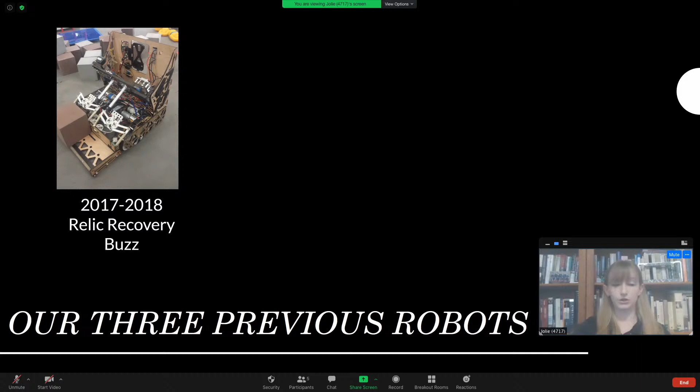So just looking at our past couple robots over the past couple years, this was our 2017-2018 robot. His name was Buzz. He was a little different. A lot of teams that year focused on a dump truck type of robot where they would intake blocks and then turn around and just shove them directly into the cryptobox. That was the scoring for that season. And so we did a little differently. We used 2 arms and then just pulled them over the robot, which you'll see in a video on another slide.

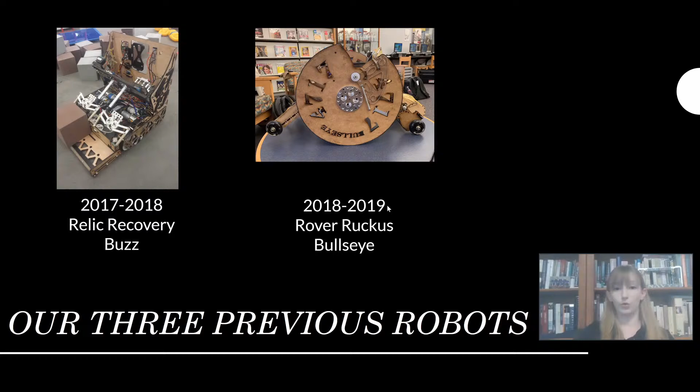So 2 seasons ago, 2018-2019, our Rover Ruckus robot was Bullseye. And the main innovative feature you'll see here is that we took a divot out of our wheels and we had 2 big wheels instead of having like a 4 to 6 wheel robot made like a tank drive type robot. And what this allowed us to do is climb over the ledge in the corner of the field.

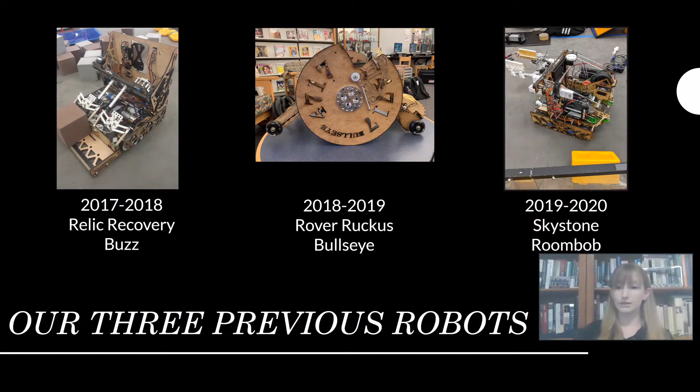And then last year, our robot for Skystone, his name was Roombob, and he focused on, instead of stacking Skystones from the top, as many other teams did, we stacked from the bottom to maintain a consistent style.

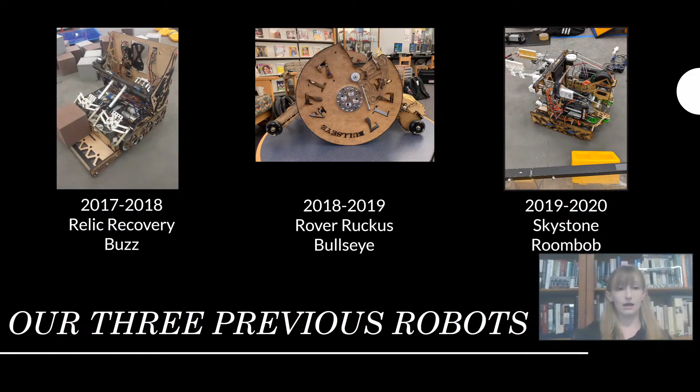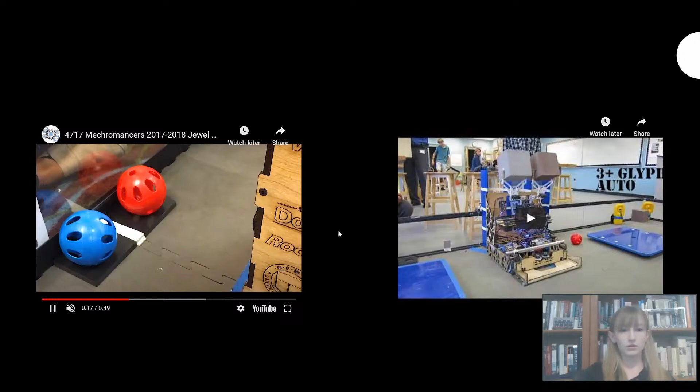So just little videos real quick to show some of the innovative things we've done over the past couple years. This was our jewel hitter in the 2017-18 season. And it relied on using a rubber band and stored energy, so that we didn't have to have another fully automated mechanism. We didn't have to have another motor or anything. It was all done on its own. We could just use a servo to release something, and you can see it uses rubber bands to actually pull

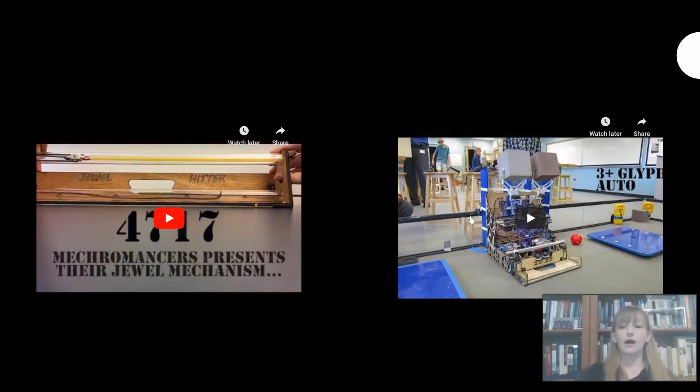the point around. And then again, from that season, you can see exactly how we lift and score instead of doing a dump truck method. So that's just a little bit there. You can see how we used sliding instead of turning and stacking.

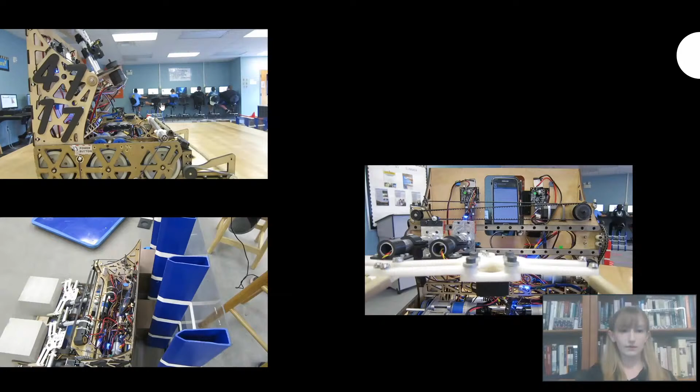So again, 3 seasons ago, you're going to see a little bit of the innovations that we were going for when designing that robot. So again, the arms going over, so we didn't have to worry about turning around. And then you'll see here, we used arms to line up specifically where we needed to go. So our robot never really had to move; it just had to go back and forth.

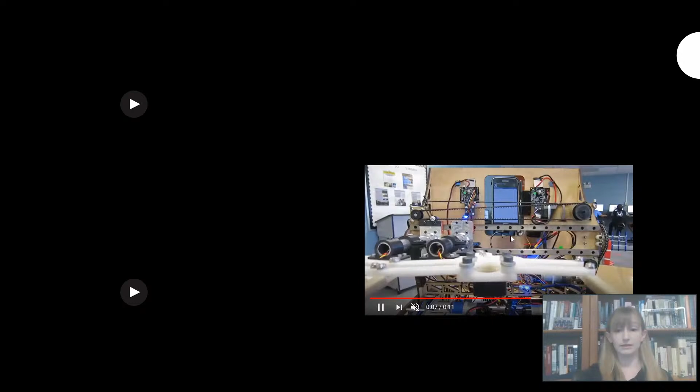And you can see again the arms. We had them automated so that they could either move on their own, or you could just press buttons and they would move together. So our Relic Recovery robot, wrong one.

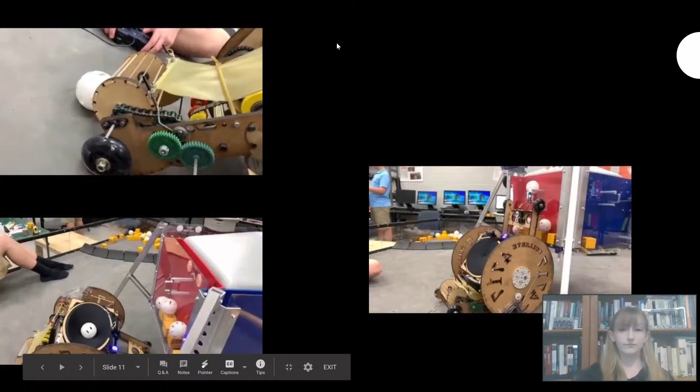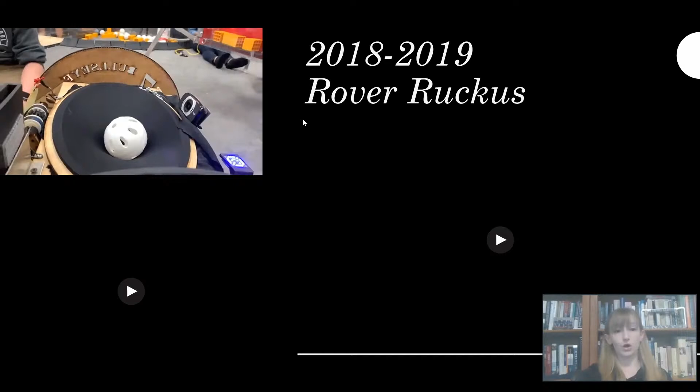Rover Ruckus robot, you can see that we chose to create an intake on an arm that could actually flip up and down. Those arms were meant to stabilize the 2 big wheels that we have on either side of the robot. And you can see we wanted to focus on launching. A lot of other teams used a scoop and dump method. And that year, you were allowed to launch as long as you were touching within the lander. You had to be underneath it somewhat. So we focused on that.

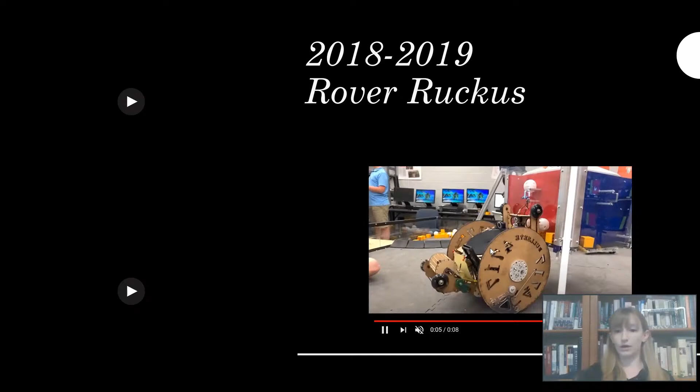And when we wanted to lift ourselves, we focused on using the entire robot to curl up instead of an elevator mechanism to just go straight. And then this past season was our Skystone robot. You can see right here, we wanted to use a conveyor belt for our intake. And that allowed us to slide everything directly out. This was our original mechanism, a shoving type mechanism, but it was having some issues, so we transitioned into that conveyor belt that you saw above.

And our main goal with this robot was to really stack from the bottom, which you didn't see a lot of times. A lot of teams went for stacking from the top, but what this allowed us to do is we never had a maximum stack limit. We could continue to stack until the time was up. We had no hardware maximum. So the innovation process, talk about that.

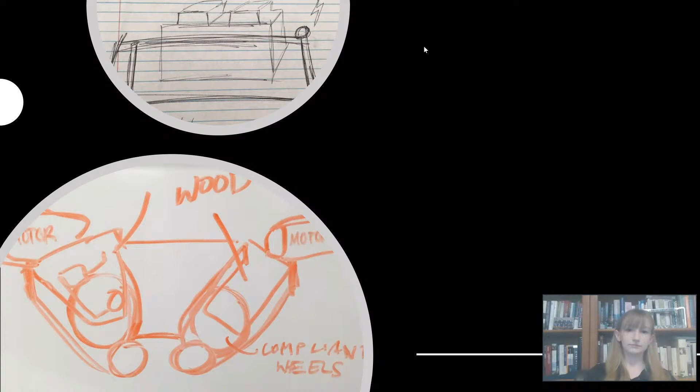Ben, you're muted. All right, I'm going to let Ben fix his muting situation. Oh, my bad. I thought I was unmuted.

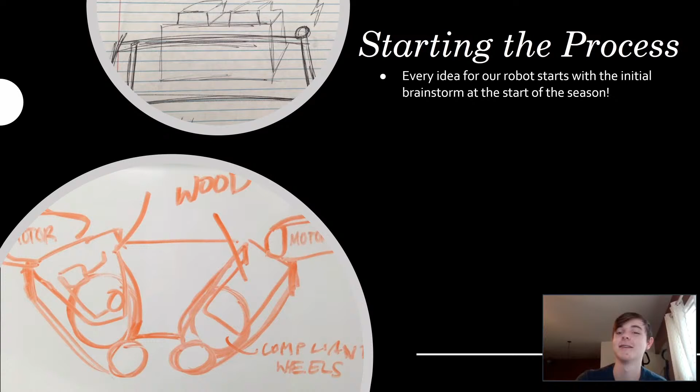So every idea for our robot starts with the initial brainstorm at the start of the season. As soon as we get the game, we look at the game, see what designs would work, and then we try to sketch it out. These are 2 of our sketches for the past season, Skystone. This is part of our intake that we saw, and it's free and easy to sketch out a design, and it helps communicate to everyone.

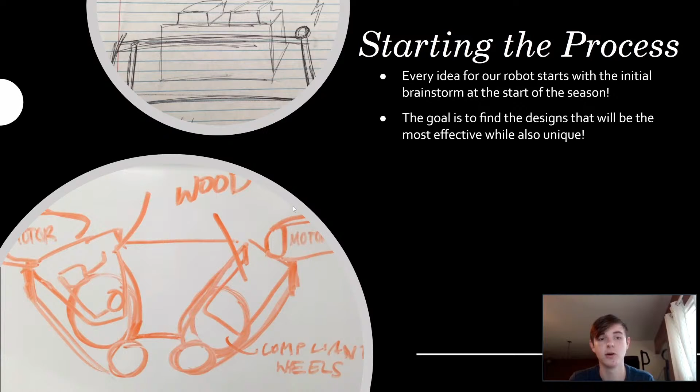But we try to see how the game can be made more interesting and provide more opportunities. So it makes the challenge more fun, and choosing a design that's going to be somewhat challenging to you, but enjoyable, leaves a lot of room for learning opportunities while still being innovative.

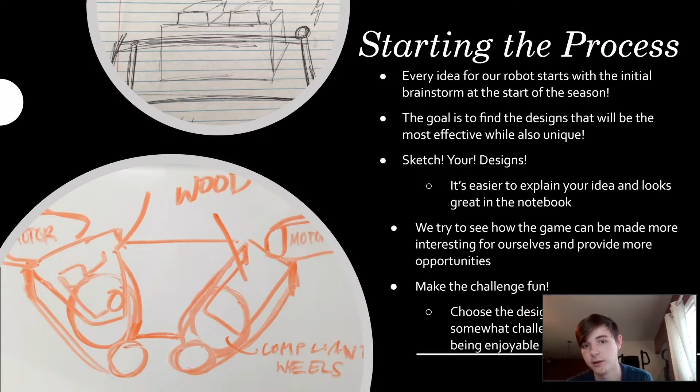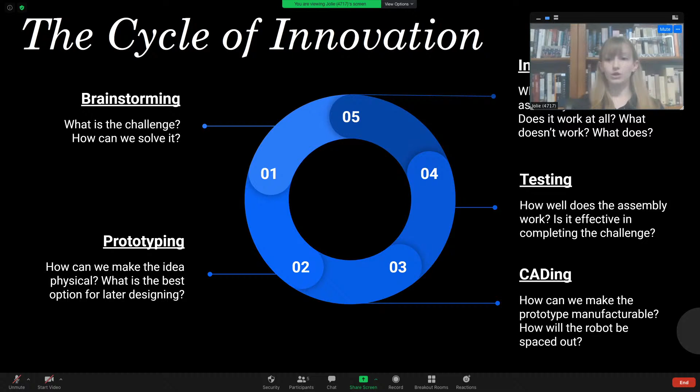And then you move on to improving. So how can you make it more effective? Does it work? What doesn't work? And how can you make it better?

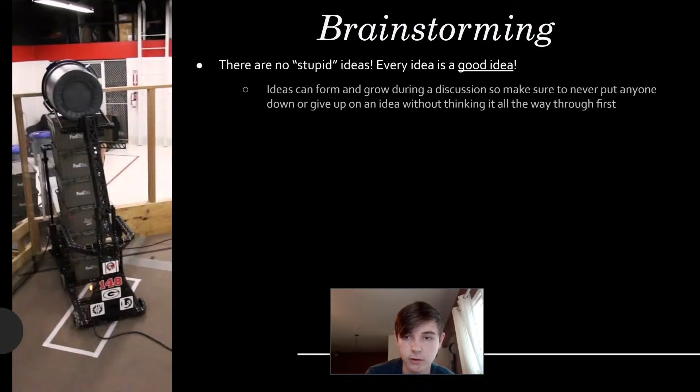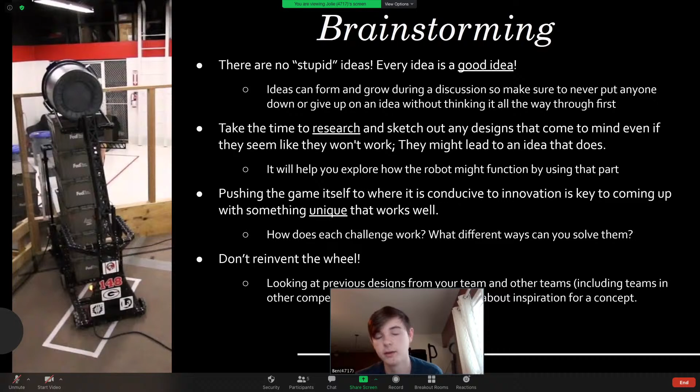All right, so the first step is brainstorming. So there are no dumb ideas. Every idea can lead to other ideas that may not have been thought of, even if the first idea wasn't even communicated. You also got to take the time to research and sketch out the designs. Any of the designs that come to mind, if you sketch them out, it'll help it be a more realized concept, even if it seems it doesn't work. It'd help you explore how the robot might function by using the part, or how it could fit into the robot as a whole.

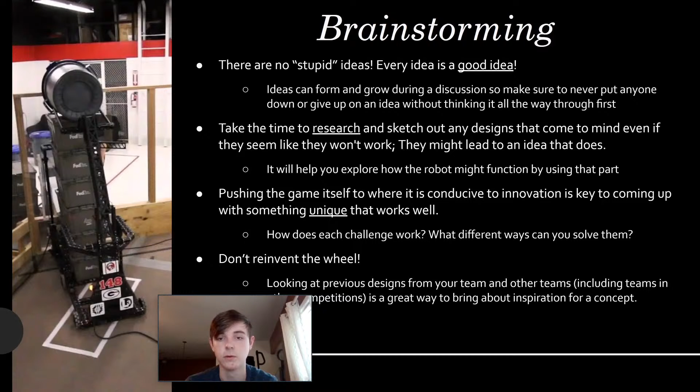And pushing the game itself is where it's conducive to innovation. So coming up with a unique way to play the game and how each game works and which way you can solve them. But don't think of every idea as having to reinvent the wheel. Look at previous designs from both your team, other teams, including not just FTC. You can see here 148 Robo Wranglers in the Recycle Rush season was an inspiration for our Skystone robot because their game was stacking recycle bins on top of each other. But they stacked them underneath. So we took that idea and then translated that into an FTC and made it more innovative towards our robot.

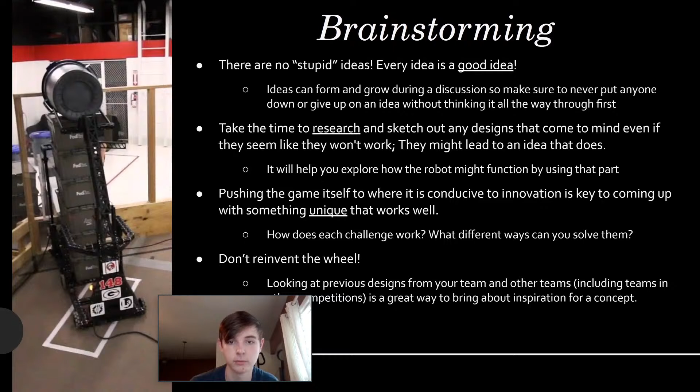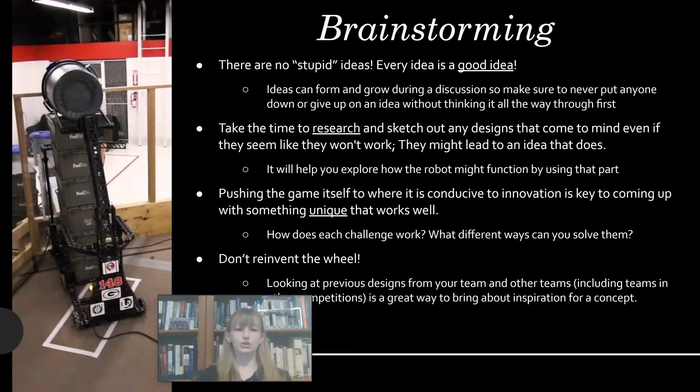Yeah, so just to emphasize, when you're doing something with an innovative idea that you have, it's always great to really research things that have come before you, just to make sure that you're not spending too much time trying to come up with something. If you see something that works, figure out how you can improve upon it.

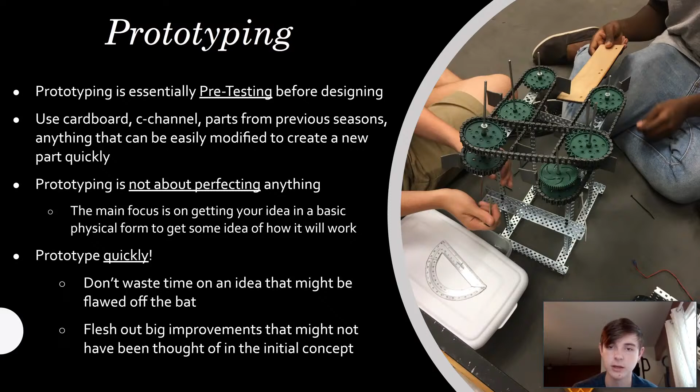And then after you brainstorm and thought of a couple ideas, prototyping is really, really important. It's basically pre-testing before you actually have to spend the time to make it and manufacture it. So you can use anything that you can get your hands on: cardboard, C-channel, Legos, I've heard from other teams. You see in this picture that it's not a very elegant design and it's not really properly made, but it's not about perfecting anything. The main focus is get some improvements that might have come out after you've made it instead of spending all that time to make the final product, but then having to realize you have to change it.

You have to do this quickly. Don't waste time on an idea that might be flawed because you might have an idea that seems like it could work, but when you prototype, it won't work at all, and then you wouldn't want to waste the time and resources on finishing the final product. And you want to flesh out those big improvements that can be made, like, oh, this wheel can't be there because it'll mesh with a different gear. That's easy to come out in prototyping, but it's really costly in time or money if you build the whole thing.

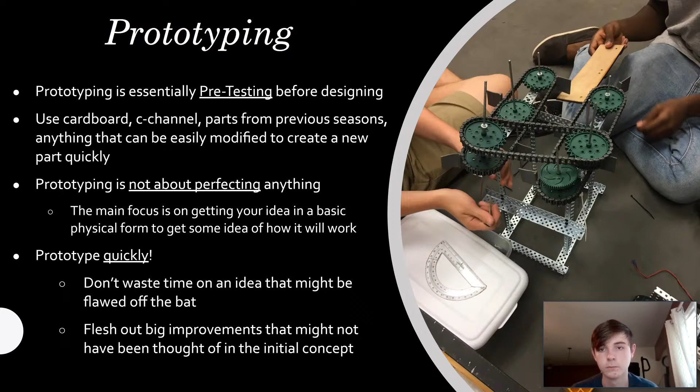Yeah, just to emphasize, when you CAD something, you can CAD anything you want, any shape you want. If you have the materials to be able to manufacture it yourself, you can do anything. And the great thing about prototyping is that it forces you to work with somewhat what you have and to really figure something out that's realistic instead of daydreaming about everything and just CADing the whole day away.

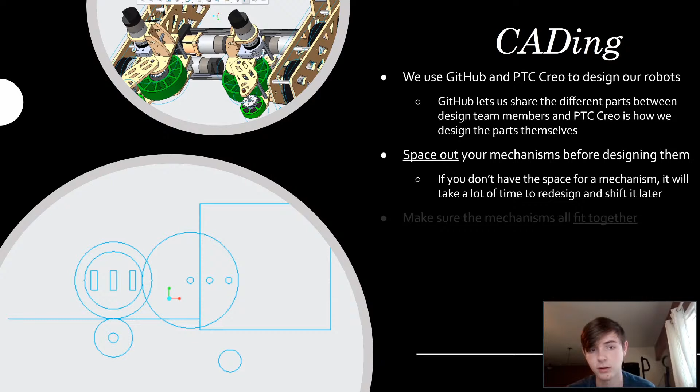So moving on to our CAD. On the topic of CADing, we use GitHub to share all of our files and resources. And the actual software we use is called PTC Creo.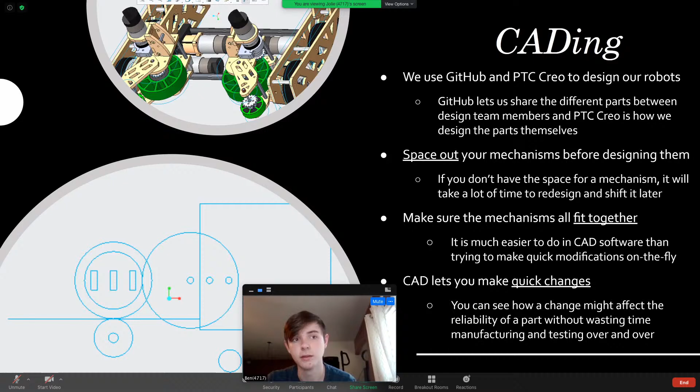PTC Creo is good because it allows you to create skeletons, which is what the bottom picture is. And it allows you to build stuff off of a simple design. So you could take your sketch that you made during the brainstorming process, put it into CAD, and then build stuff off of it. And another good thing about CAD is you can space out your mechanisms.

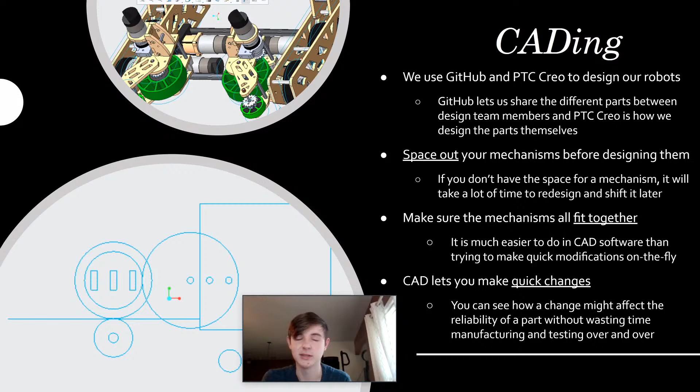So if you were just trying to build it on the fly, you might run into a problem of, oh, this mechanism doesn't have enough space to put next to this other mechanism. But in CAD, you can see that and you can make changes effectively. And it doesn't take a lot of time to change something in the CAD, but it would take a lot of time and resources to change something on the actual robot. So CAD can let you make quick changes and see how it could affect reliability without wasting time manufacturing.

So after you've CAD'd and manufactured everything, obviously you have to test. So we like to keep a log, just like in science class. If you don't write it down, it never happened. Usually this log will be the engineering notebook, which we'll talk about later, which makes it easier for the notebook to happen. And your idea is never completely finished the first build. The more you test, the more reliable it will be.

But don't give up on an idea just because it doesn't work once. Sometimes just a few small tweaks will just work, and it'll make it easier to work in competition without abandoning the idea all in all. More innovative ideas like our previous robots come with a lot of testing because you can't really look at other people's and see, oh, what do they do? How do I fix it? You really have to come up with it yourself, and a lot of the ideas won't work, but you just have to keep testing and testing.

Sometimes assemblies will not work at your first competition. One of our ideas in the Relic Recovery season didn't work a single time up until the league championship. But then once it worked, we got it down really reliable and it was faster than a lot of the other mechanisms. But we had to take the time to improve it and test it a lot of times.

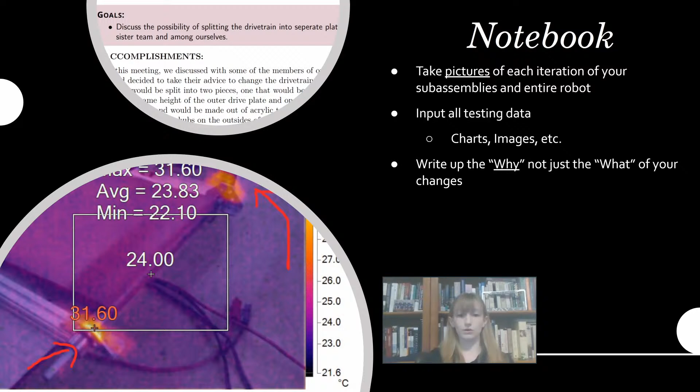Again, write up the why, not just the what of your changes, because just writing, oh, hey, we added another screw to it. Why? Was it because it was too loose? What made you change something on there? If you don't write the why, you're bound to just repeat your mistakes again. And again, quality of words over quantity of words. If you're not getting anywhere with the words that you're writing down, you're not going to understand what you're trying to say, even if it's 3 paragraphs long versus 1 or 2 sentences that really gets all the data across.

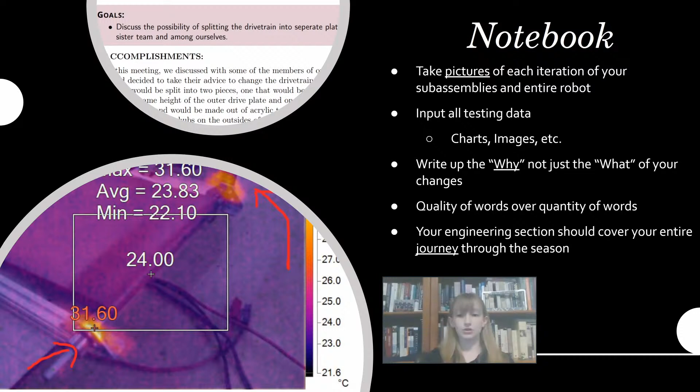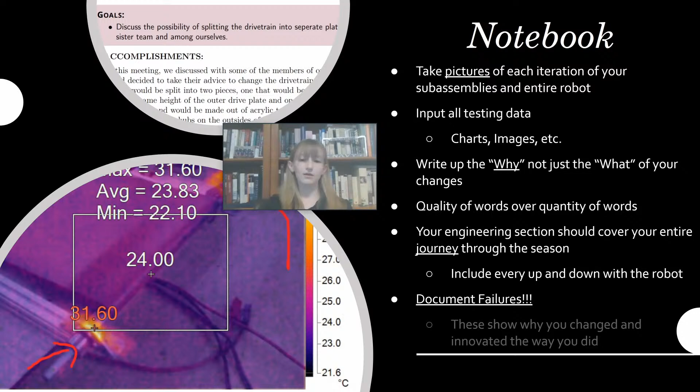And your engineering section should cover the entire journey through the season of your robot. So from day 1 of 4 wheels and C channel all the way to the end of high scoring at your league championship, you really want to make sure you get from point A to point B to the finish line, everything that you've written. Every up and down, every failure, document your failures, okay? These are really important because you need to understand why did it fail? How can I make sure that it doesn't fail again? Learn from your failures. Woody Flowers told us that all the time, guys. Learn. Show why you changed what you did. Always the why when you're writing for your notebook.

So just some quick tips when you start your brainstorming. Read the game manual because you can have an amazing idea. It can complete everything you've ever dreamed of. But if you don't know what the rules are, you could be violating something, and that's just going to cause you issues later on when you have to fix that idea to try to meet the rules of the game manual.

Not every single part of your robot has to be entirely unique and innovative. Innovative robots, like the award itself said, just something on your robot that is unique and innovative and completes something efficiently and effectively. You don't have to have your entire robot be innovative. In fact, sometimes it's even better to not do that.

As long as it's reliable, put it on there. You can have parts that are similar to other teams. A lot of teams come up with the same ideas. That's okay. Watch YouTube videos of other teams designing. But whatever you do, build off of their ideas.

If you see something that somebody else has built and you want to understand how they built it, ask them. Ask them, how did you design that? What did you come up with?

It's okay to walk away from an idea that's not working. We said this earlier, but really, if you have something that's just taken up way too much time and it's still not working, sometimes you just have to walk away, get a clear head, try something else. You either figure out whatever was causing the issue when you walk away, or you determine that something else is more efficient and more effective in your design.

And CADing. I cannot stress enough how great it is to CAD something before you build it. You can see any issues that might be there before you buy all the parts and try to build it all yourself. And when you CAD, you can really make sure that you've spaced out enough area for each mechanism that you're putting on there.